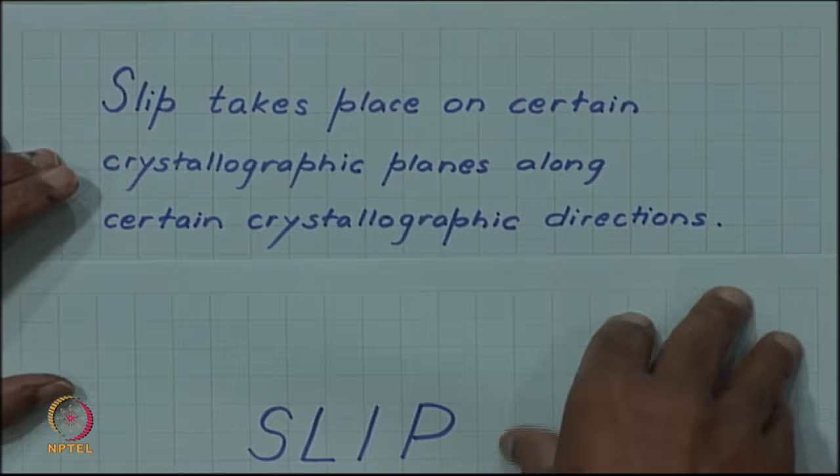So, one of the experimental observations regarding slip was that slip takes place only on certain crystallographic planes along certain crystallographic directions. When slip became important in the consciousness of scientists working on plastic deformation, they started doing careful experiments, and these require a lot of careful experiments on single crystals and with X-ray diffraction, because you have to find the orientations of the crystal before deformation and after deformation. Such careful experiments then established that in any given material, in any given crystal, when you are deforming, slip takes place on certain crystallographic planes along certain crystallographic directions.

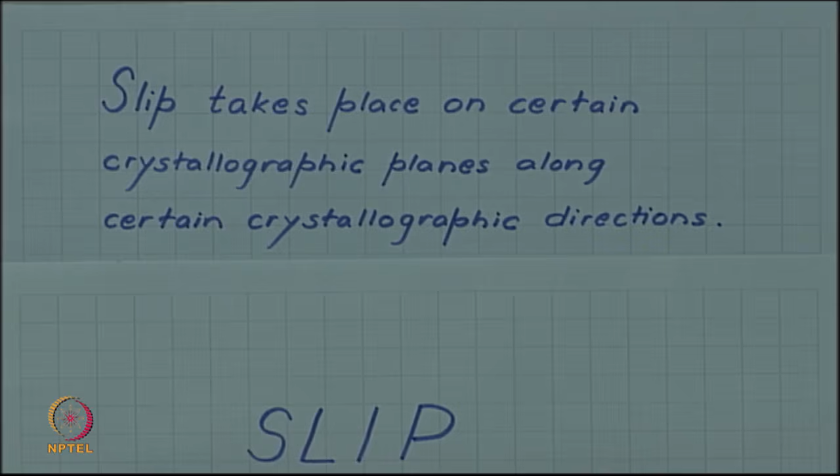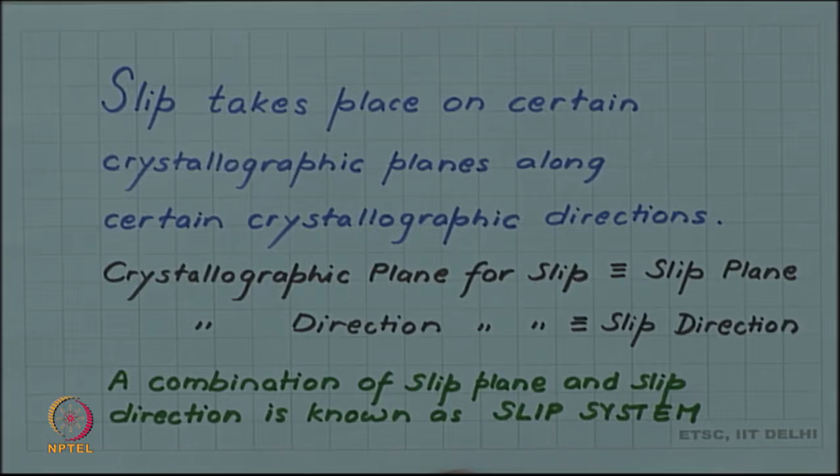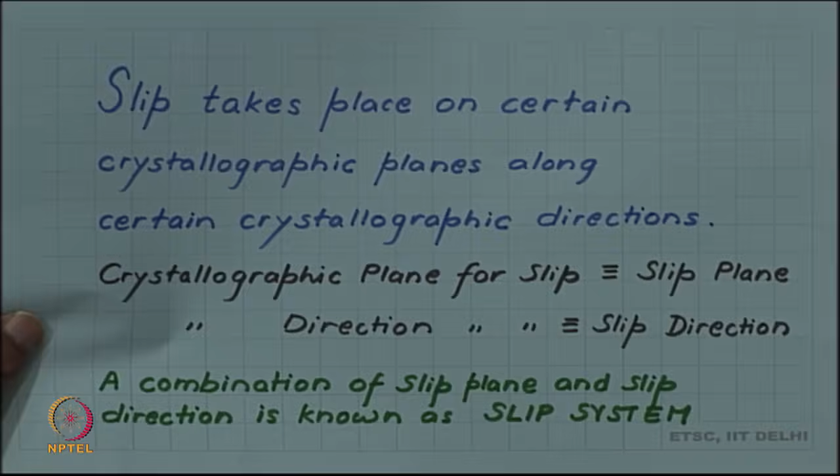By crystallographic I mean that a particular, specific Miller indices of the plane, a particular orientation of the plane, will be suitable for slip, not all planes, and similarly certain crystallographic directions will be suitable for slip and not any arbitrary direction. Then the next interesting thing was that these crystallographic planes for slip were known as slip planes, and the crystallographic directions were the slip directions. We also have a term called slip system, which is a combination of slip plane and slip direction lying in that plane.

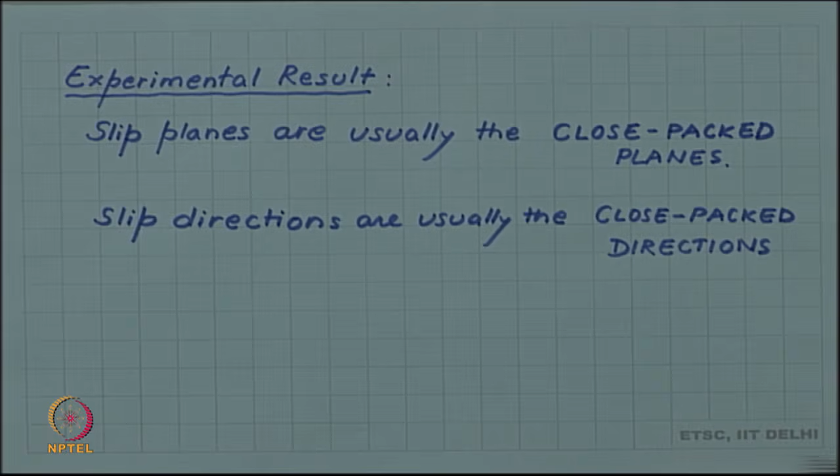So, with this terminology, slip plane, slip direction and slip system, let us look at the next interesting result, again an experimental result: slip planes are usually the close packed planes. We have seen various crystal structures, and particularly in cubic close packed and hexagonal close packed crystals, there are certain planes which have a very high density of packing, and they are the close packed planes. Similarly, certain directions are close packed directions. For example, in cubic close packed structure, the face diagonals are the close packed directions. They found that the slip was happening on these close packed planes in these close packed directions.

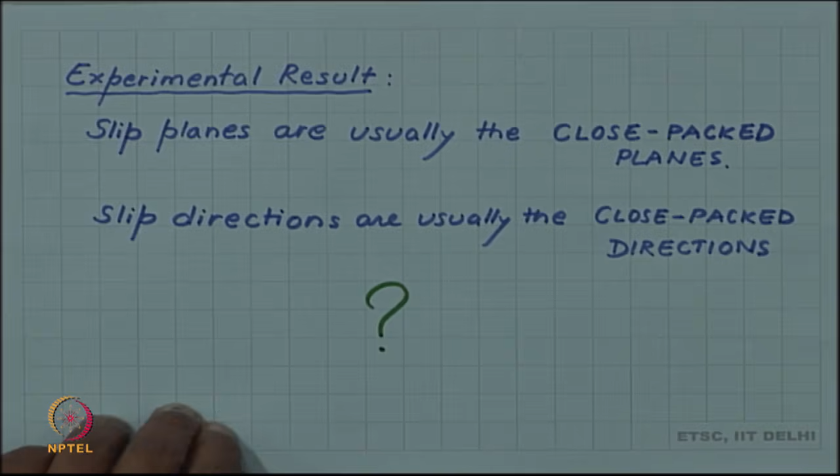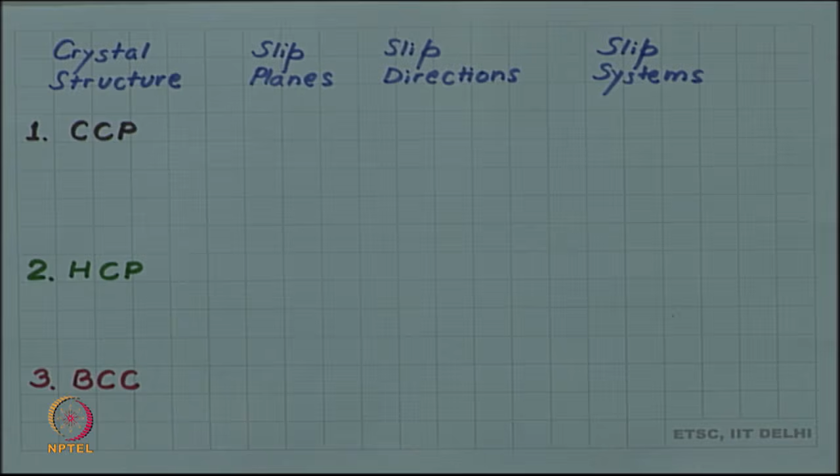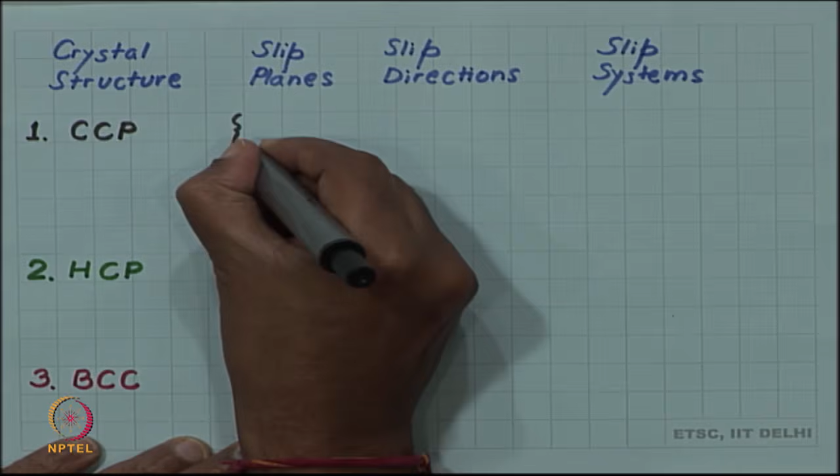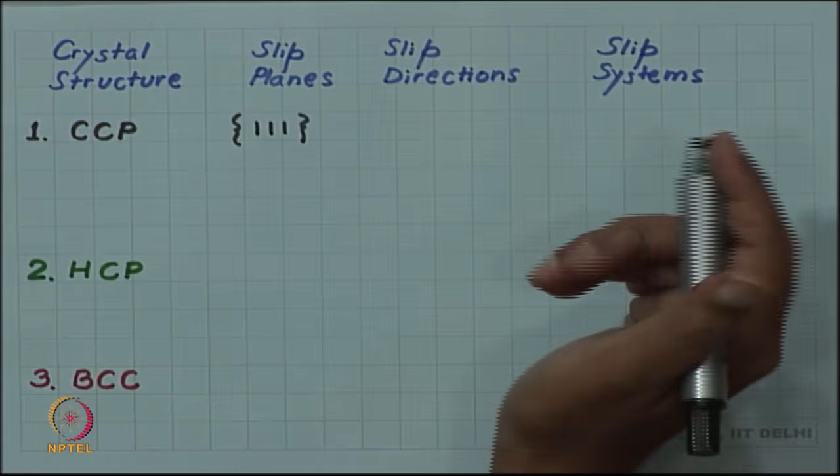Of course, this again threw up a question: why are close packed planes and close packed directions being favored? We will look at it as we go along, but let us first note down what result they found for different crystal structures. So, for the cubic close packed structure, as you know, CCP, the close packed planes are of the {111} type. You will need to review some of your crystallography videos, where we have discussed these things. So, close packed planes in CCP are of the {111} type, and the slip direction, the close packed direction, is of the <110> type.

Notice the use of brackets. I am using curly brackets because it is not just the (111) plane, there are 4 such planes in the crystal. And similarly, there is not just one [110] direction. This is a slip direction, a close packed direction in the cubic close packed structure, and this is a face diagonal, and there are 6 different face diagonals in a CCP crystal. So, the number here is 6. The total number of slip systems, and the way to write the slip system is to write the plane and direction next to each other. So, we will write {111} and <110>.

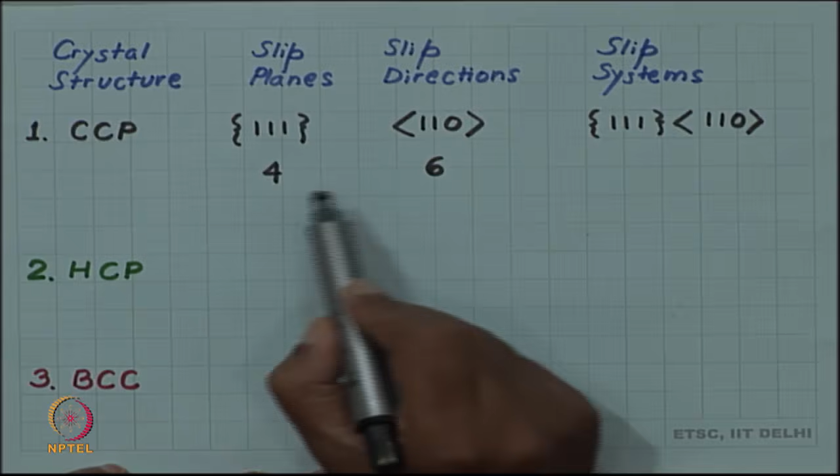But recall that we have 6 directions and 4 planes. So, we may think that there will be 24 slip systems, but not really, because out of these 6 directions, all 6 do not lie on each of these 4 planes. In any given plane only 3 of the slip directions lie. So, for every plane we have 3 directions. So, for 4 planes we have 12 directions. So, 4 into 3, 12 slip systems are there.

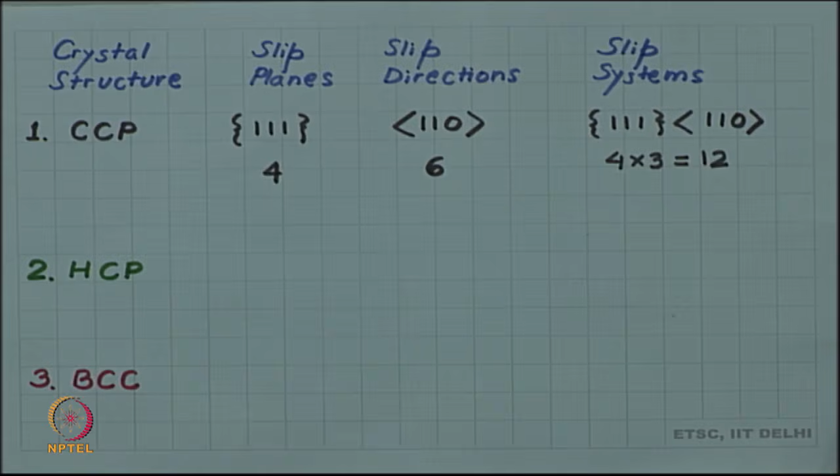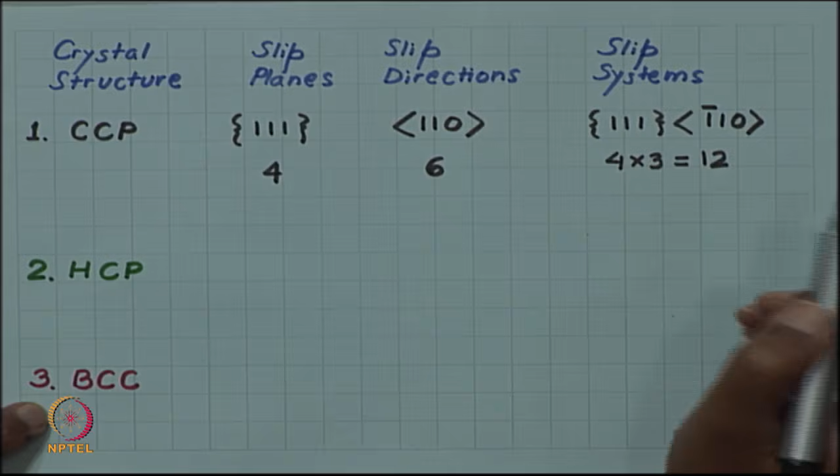Sometimes if you really want to be careful, you can insist that the direction lies on the plane. So, you can satisfy the particular choice which you have made using the Weiss zone law. So, I can write bar 110 instead of 110, but recall that the bar 110 family is the same as the 110 family, because it also belongs to the same family, and any member of the family can represent the entire family. Only here, writing it as bar 110 then satisfies the Weiss zone law with 111, what I have written here. So, it shows that the slip direction should lie on the slip plane, and that is why we have 4 into 3, 12 slip systems and not 4 into 6, 24 slip systems.

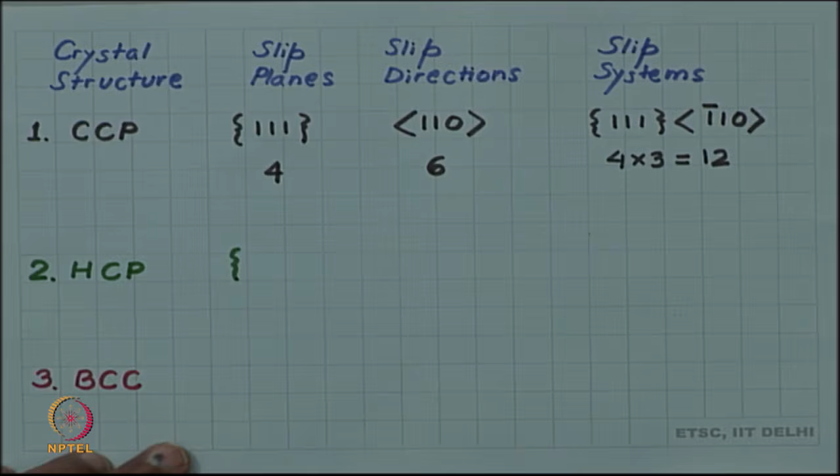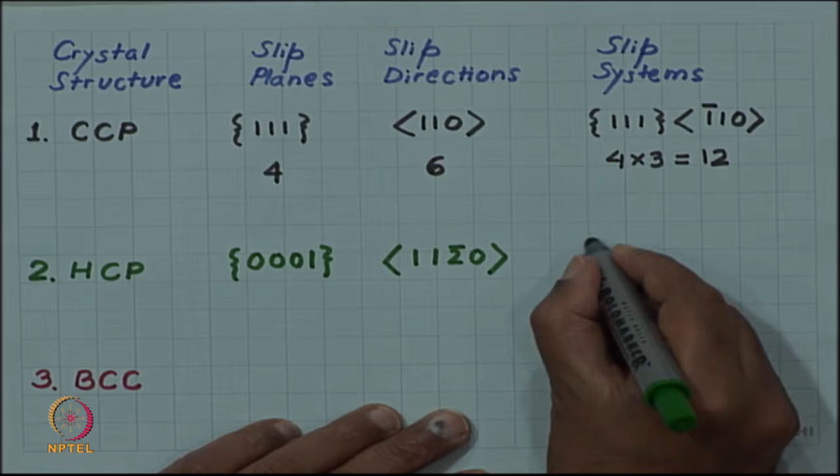In the hexagonal close packed system, we have the 0001 plane as the slip plane, and the 11 2 bar 0 direction as the slip direction. So, you have this as your slip system.

Here if you think of 0001, this is actually a basal plane. This is what is called the basal plane, and there is only one set of such plane. And in a given plane in a hexagonal crystal, there are only 3 such slip directions, 3 close packed directions. So, you have a rather limited number of slip systems in hexagonal, that is only 3 slip systems.

It is an experimental observation that many hexagonal close packed materials are actually brittle, whereas many cubic close packed materials are quite ductile. And one reason leading to this sort of behavior is the number of slip systems itself. You can see the paucity of slip systems in hexagonal close packed system will lead to a lack of possibility of slipping, and that is why lack of possibility of plastic deformation. And if plastic deformation cannot happen, the material cannot deform and it will behave like a brittle material, whereas cubic close packed has a number of slip systems and behaves in a ductile manner. This is a very simplistic explanation, but this is one of the pointers towards this difference in the behavior of CCP and HCP material.

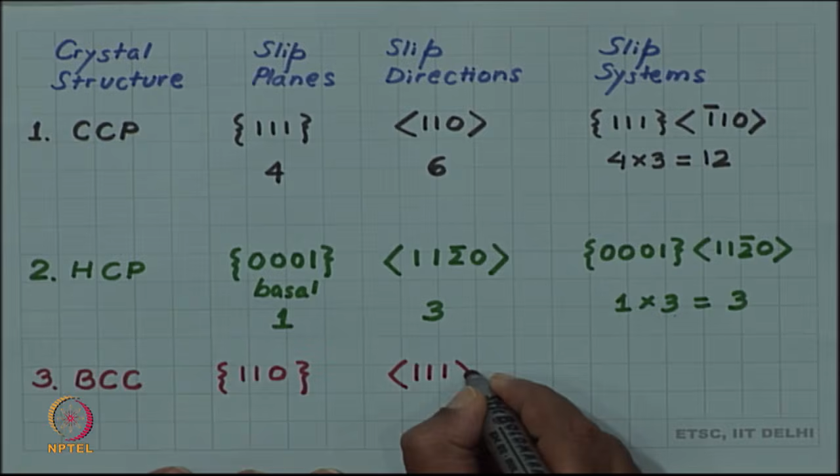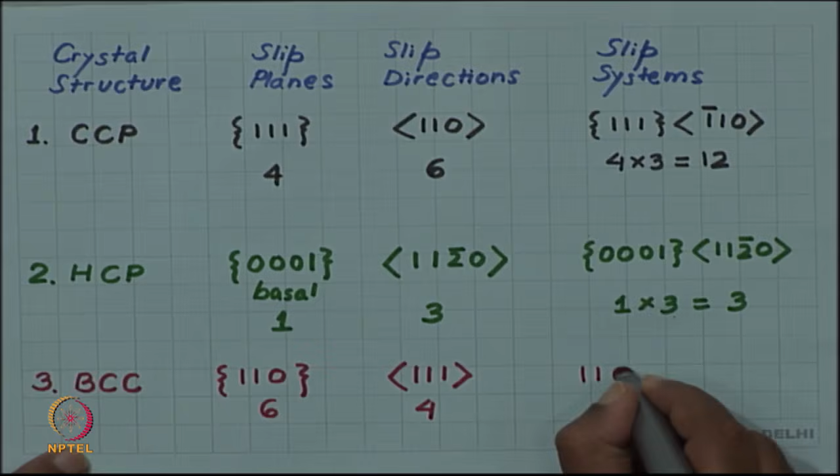Finally, if we look at BCC, in the BCC there is actually no close packed plane. So, the nearest close packed plane is 110, but there are well defined close packed directions, that is the body diagonal. So, it is 111. So, if you look at the numbers again, this 110 comes out to 6 and this 111 comes out to be 4. You can see that the situation is just reversed from that of CCP, and then you have the slip system. I can again make it consistent with the Weiss zone law, and you will again have 12 slip systems.

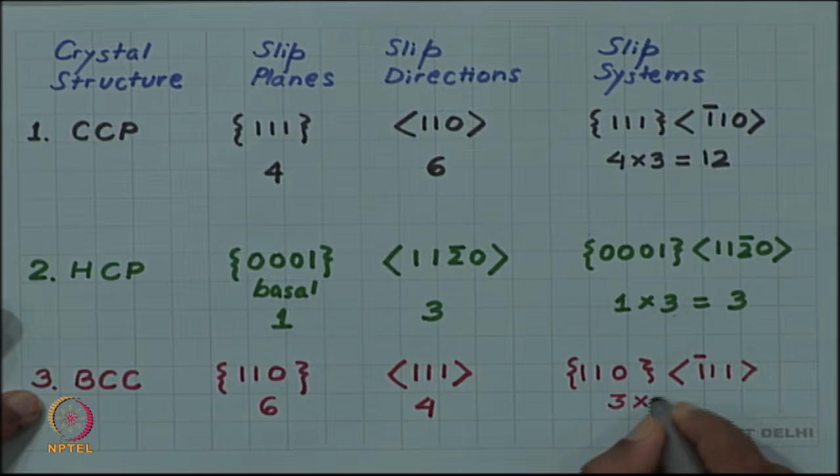In fact, if I am making a mistake here, although you have 12 slip systems, we have to look at it carefully. There are 6 such 110 planes, and in each plane there are only 2 directions. So, I should write it as 6 into 2, 12 slip systems. I leave this as a crystallographic exercise for you to work these out. I have only given you the outline. This you can do easily.

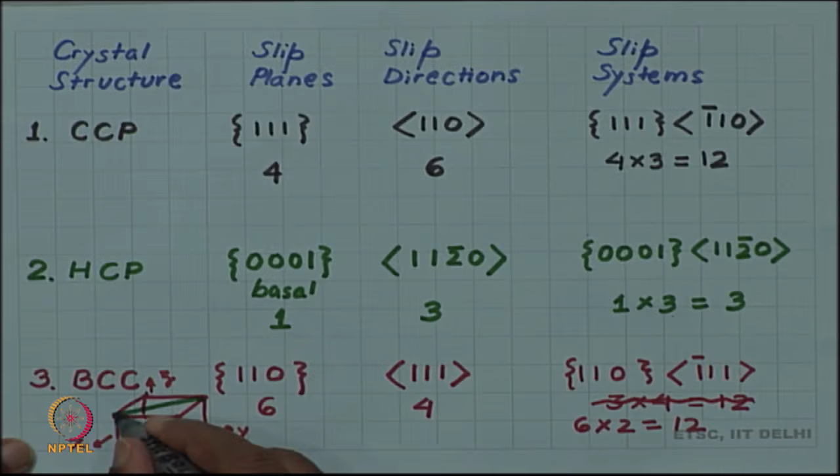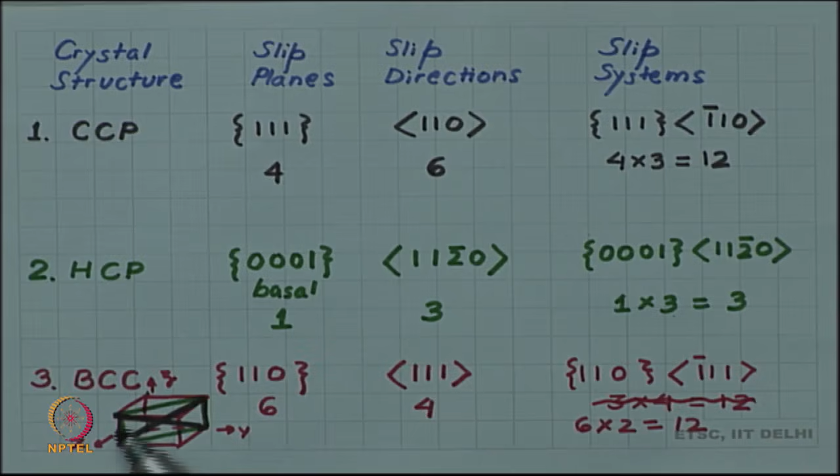For example, what I said about the BCC can be seen in the BCC unit cell. So, if you take this as your x axis, y and z, then a 110 plane will be this green plane, and 111 kind of direction, the body diagonals, are the 2 body diagonals which are lying in this plane like this. So, this green plane and these 2 directions give you 2 out of these 12 slip systems. I leave this as an exercise for you to find out the other 10 slip systems and draw them for BCC as well as do that for HCP and CCP.